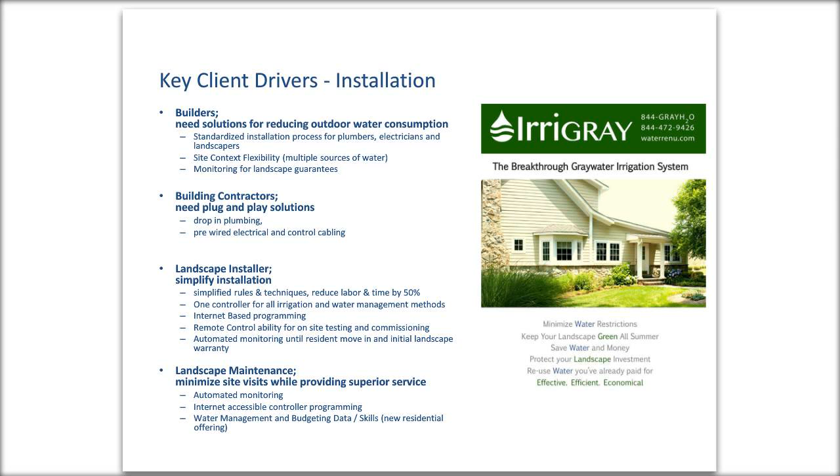What are the things we look out for when we design our products? It's not just about making the client happy. It's also about giving solutions to the builders and contractors, making it easy for them. Our feedback is that their number one concern is long-term support of the product, that they can remotely check systems, be notified automatically if there are any issues, and remotely reprogram or make changes if a customer doesn't want to do it themselves.

So we'll jump on to the next one. Here is what the system is: a small collection chamber, 18 inches in diameter. The effective or useful height is 30 inches deep, but you can have extensions to bring it up to ground level. Its job is purely to collect water, and when there's between 5 to 10 gallons, it activates and pushes water through a self-cleaning filtration system, which is also a water management module—that's the component in the middle. That then sends water out to up to 16 irrigation zones.

All of this is controlled by an Android-based tablet. This controller can work on the internet or off the internet. The vast majority of our customers want it connected to the internet because we then have built-in monitoring of their service. We have a lot of other options that can connect in, such as rainwater storage—I'll touch on that later. Condensate is a big thing happening in Texas. Certainly RO waste, reverse osmosis, as long as it's diluted. We have other uses such as potable gardens or vegetable gardens, which can't use greywater, and so forth. We'll talk about those in a few minutes too.

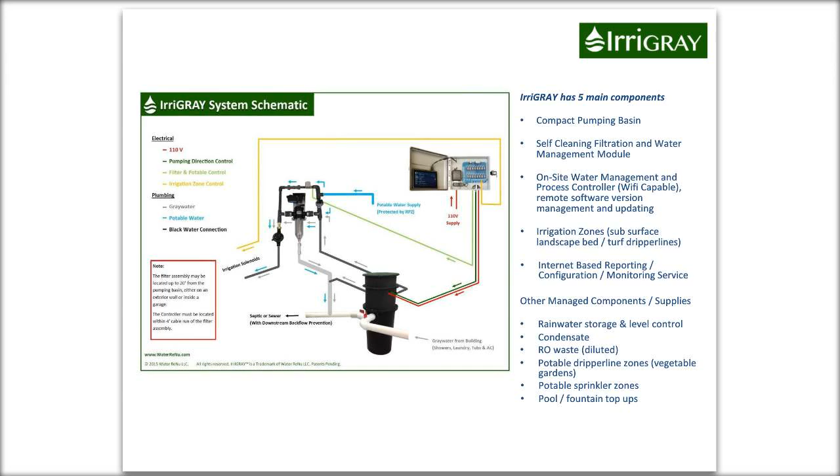So here's a quick look. As I said, 18 inches diameter, 30 inches deep. This is a happy medium for the builders on new homes, although it also works very well for retrofits if it's pier and beam. It's not a storage unit. It's not intended to be.

We believe that storage units actually create more trouble than they're worth. We do have larger basins, or in fact use twin basins for, say, commercial applications such as hotels. Hotels often do something like 600 gallons of very dirty grey water a day, so we handle that a little differently in the system.

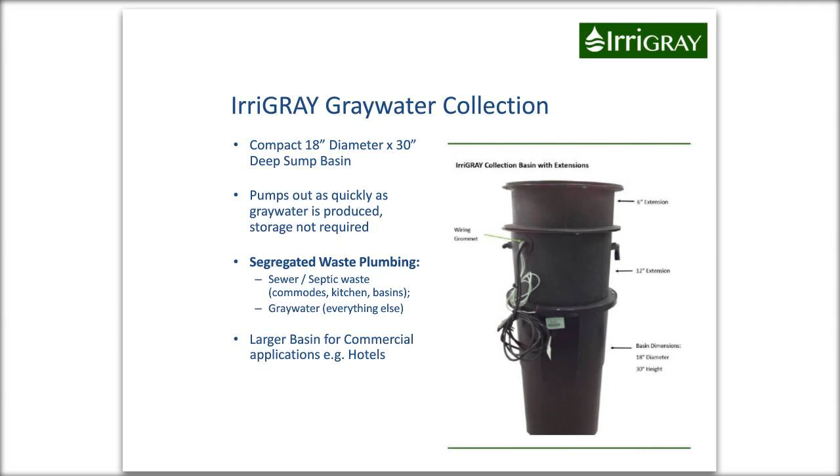This shows inside. We actually have a pre-filter before the pump. This is a coarse filter, and we actually don't really call it a filter. It's basically a foreign objects bag. It is to stop the crazy stuff that gets into a system from getting through to the pump, and we say it needs to be emptied once a year.

Practically we found that a family of 6 people only need to empty that maybe once every 3 years. It's quite coarse, about more than 1/8 of an inch in the filter separation. The other valves inside the pumping basin determine whether the water is going to irrigation or whether it's going to waste, and we'll get to that in a minute.

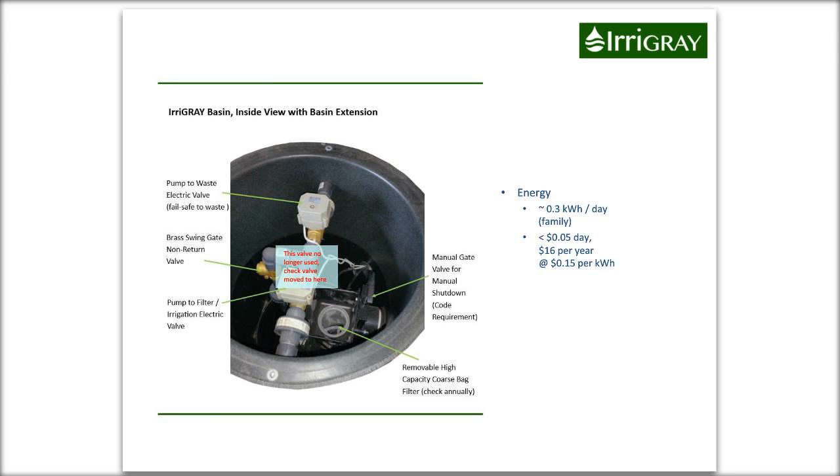This is the basic filter module. This is one example, a Lakos twister clean. When it cleans or needs cleaning, the filter turns 90 degrees by the actuator. Water goes in a different direction and blows all the dirt and other bits and pieces off the filter going to waste.

We have 2 valves feeding it. One valve is a backwash supply solenoid so that it only washes the filter. The other valve at the top is to give us potable supply, and that is essential in our experience to do things such as flushing drip lines to make sure that soap does not create issues with emitters in the future. You see we also have a meter. The meter is critical in the IrriGRAY system. Everything that we do is metered or the flow sensed.

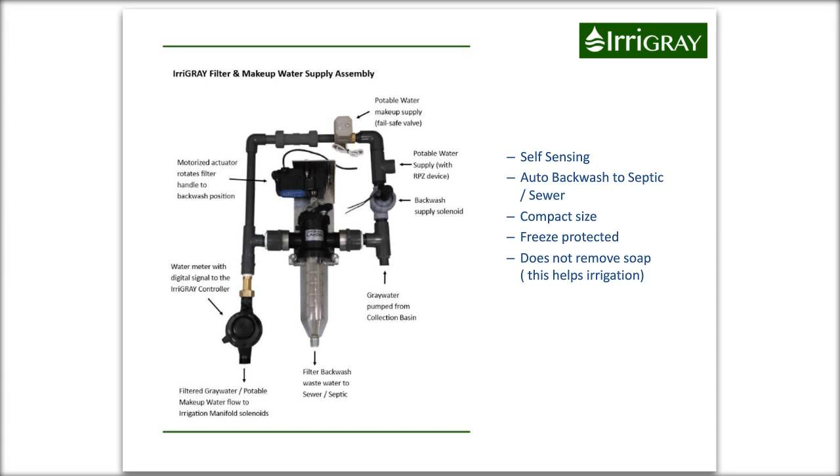Here's some other alternatives, disc filters. These are typically used on larger commercial applications, but also where there are water supply issues, such as low pressure or low flow. Note that the low flow is an issue for flushing drip lines on a regular basis, also for flushing filters. So these disc filters don't need as much water.

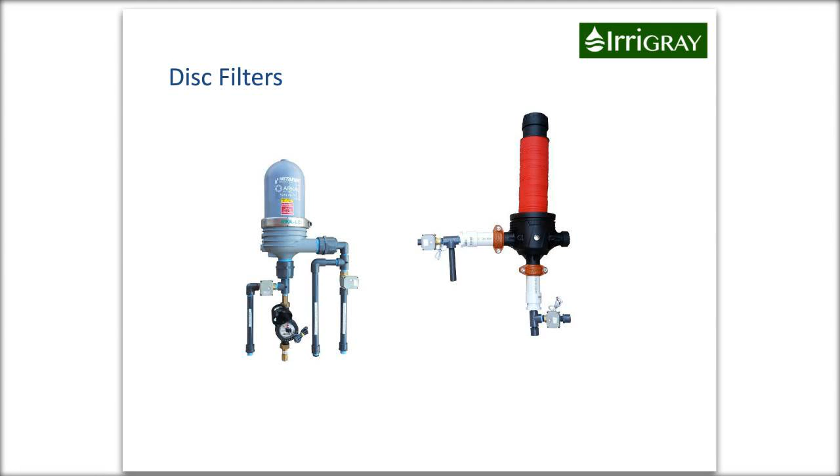They are not necessarily a cheap option. The first filter there is about a $1,300 option, and economically you can't justify water savings, as in this only needs to be cleaned 1/50th at the time of the screen filter. But you'll never recover that extra investment just because of the cost of water. However, as I said before, there are practical requirements in some installations to use these filters.

To briefly touch on the irrigation side, we use drip line, 2 different types. We have 2-gallon per hour emitters for landscape beds, generally 3-foot separation and 12-inch centers, whereas turf must be every 12 inches. This is to prevent any striping effects.

We'll note that for everywhere in the US there's no restrictions on grey water, very few restrictions on potable water for drip, other than some locations such as San Antonio, Texas. We'll point out that this is a capillary irrigation system in that it is designed to have moisture in the soil every day.

The IrriGRAY controller has been designed and developed by us, also manufactured by subcontractors. It is based on an Android tablet. It sits in the box all the time, and various sensors connect into it, or cables on these sensors.

This question came up. Actually, I'm going to respond to the two questions. I know, Laura, you're going to read them out. First, the question was, when is it... Wait, actually Paul, we're going to do the whole presentation and then we'll do the questions at the end. Okay, all right. So, look, basically the box is a box.

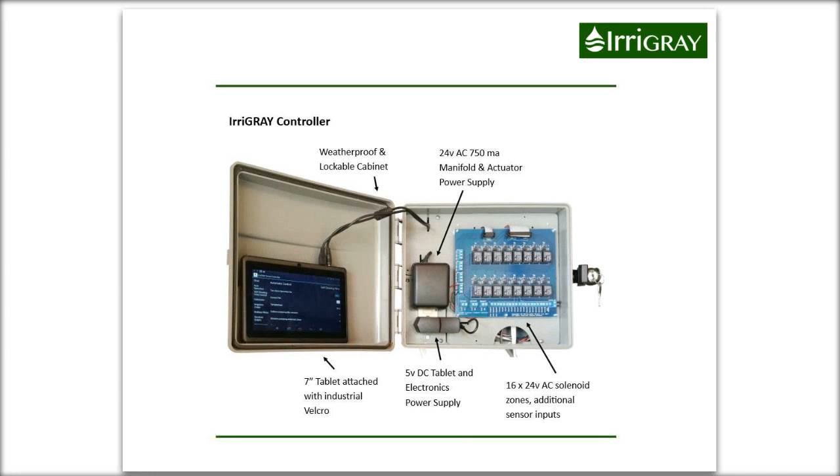The tablet can sit there. You don't need to touch it. Now, if you want to, you can go to the internet, and we'll look at that in a minute. Or you can run it as a standalone unit.

Where do things get interesting? This is all software controlled, and that controller is also software updatable. It self-updates to the correct version that we decide is correct for a client, which means that if a client has particular needs we haven't come across before, we can actually trial some changes in the system. The client doesn't have to touch anything, neither does their contractor, and we can monitor everything. And when we're happy with those changes, we can push those changes out to other clients as well.

But when you think about Greywater, what's a great example? How do you manage Greywater throughout the year? If you're on a larger property, you've got a septic, you probably want to keep your Greywater away from the septic, it reduces your maintenance costs, but you don't have anywhere to realistically use it for growing anything in the middle of winter. So this system is an advanced enough system that it knows when to put water out. During summer, you want to use every drop. You can just decide which months you don't want to use excess Greywater in growing things. Instead of going to the septic, you can have it go to a leach field and so forth.

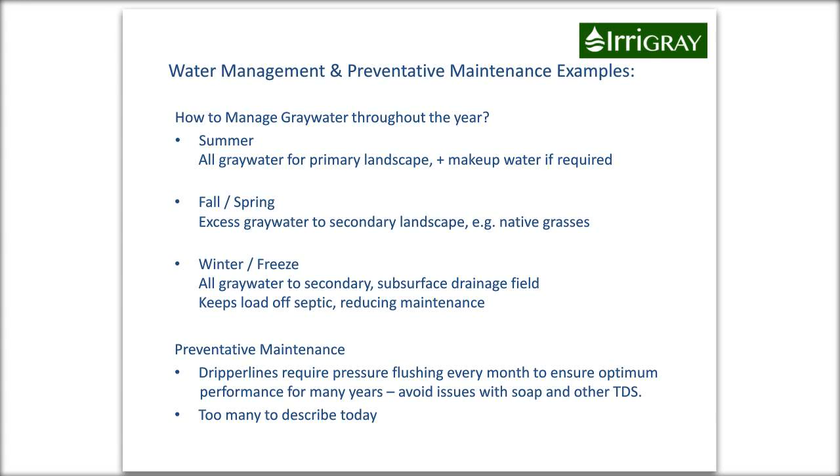Then there are other issues such as preventative maintenance. And as I said, dripper lines really do need flushing. The dissolved soap in dripper lines, particularly with under turf drip lines, can cause clogging after generally 3 months, but we do preventative maintenance automatically every month.

This is where I'd like to spend hopefully no more. I think I've got 3 minutes left, so we'll run through pretty quickly.

This is the controller software on the internet. Now, what you see here is the same as is on the tablet. They're exactly the same, a couple of minor differences. But what is developed on the internet is also the same on the tablet. You can do this on the tablet. You can do it on the internet. You can create different versions of settings on the internet. You can select which version you want to make current. And within a minute or 2 minutes, I think it is, the tablet will automatically update itself to these new settings.

But starting here very quickly, how the system is programmed. Start off with climate and water. Select where you are. It grabs all of the relevant evapotranspiration values for your area. You decide, for example, in January, February, November, December, we don't want to use too much Greywater, so that can be sent either to waste or it can be sent off to a disposal zone, and we'll see those in a minute.

Further down that page, you can then set which days you are allowed to do various types of potable water use, and they are different for sprinklers as compared to dripper lines, and there are restrictions coming in about dripper lines in various areas at the moment, more so in Texas and California, it seems.

So once you've set the information about where you are, then you can set up the zones. Here's an example, Zone 2, Greywater Turf South. This is one of our test units. We do a lot of testing. So this zone only has an area of 200 square feet. We've selected a particular planting type, the density, and which days of the week it would normally get Greywater. And that is all there is to programming the system. There's no minutes, nothing else. The system calculates it for you.

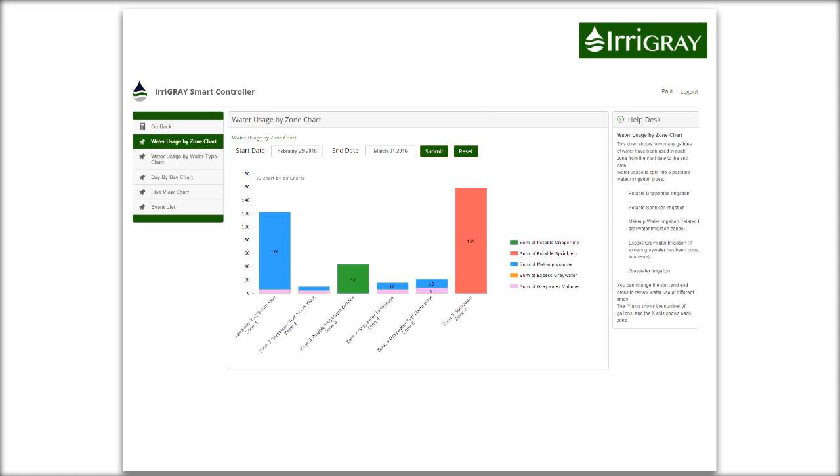Once we've programmed it and it's been running for a while, then you can start seeing some of the charts. And the reason for so many different colors is we have different types of water. We've got green here, which is potable water only drip lines. Red is sprinklers. Purple is Greywater that's going out during the day. And the blue is makeup. So they didn't have enough purple in this test environment that we were running.

Then you can start to see usage day by day, how much of the different types of water you're using. You can even see down to the minute level. We can zoom in further if we were live. At various times of the day, different symbols indicate when things have happened. It's very useful sometimes. I don't believe...

There is one that I didn't show. At the bottom of that menu on the left, it says event list. You can actually see everything that happens, or every bit of data that is sent from the controller to our internet server. And that includes information such as flow rates, pressure on different zones, temperature, battery levels, depth of water in the pumping basin, and so forth.

This last one, and I'll finish, is to give an example. I'd love to show this live, but we trialed this yesterday and it's just too slow on the internet on this session. But one of the most valuable features that our installers have found is the ability to have this remote control. You can totally take charge of any individual function, singly or together, on the system to test flow rates, pressures, and that's normally done to detect if there's any blockages anywhere or whether any distribution lines have been damaged and so forth. So I've run out of time. Let's go to questions, I believe.

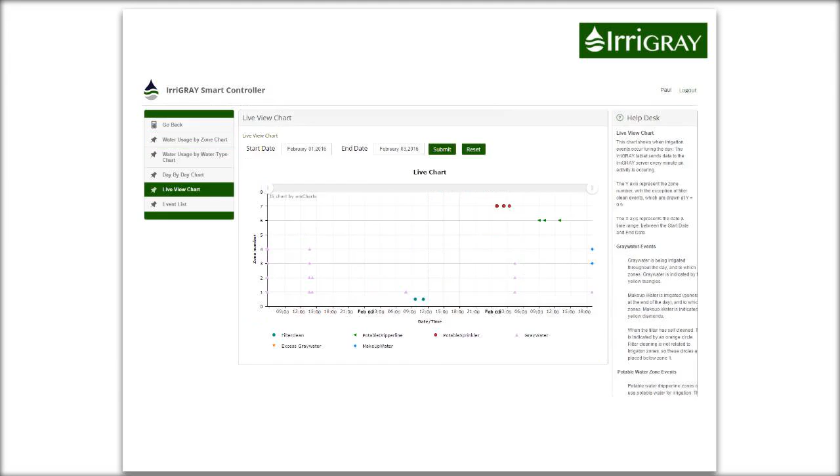Next question, Laura. So the next question is, can all of your systems accommodate the rainwater storage option? Absolutely. I'm going to take a sec to get back there. There we go. What we do is effectively consider that the rainwater storage is in line between potable water and the water management system. And then we treat the rainwater storage as a unit that never runs dry, so we actually manage how much water is in this rainwater tank. It's critical to always use rainwater when it's available so that you can then leave space in the tank for when it rains next time.

I know that IrriGRAY is being installed in a subdivision in San Antonio, Texas. Could you give us an update on that project? Yeah, it's actually San Angelo in Texas. Oh, excuse me, San Angelo. That's okay. It was an interesting one. It's been driven by the builders and the developers rather than the city, although the city is very happy to be supporting it. San Angelo came within 3 months of running out of water. The builders are under a lot of pressure.

The communities do not want more homes built unless these new homes are water efficient outdoors as well as indoors. So what happens is the developer gets together with his selected builders and says, I want this subdivision to be water efficient. It makes it easier for me to get my permits, less public resistance. And when people see one subdivision that mandates it, they start going to the other subdivision saying, look, you need to do this too, because I'd rather buy in the other subdivision. I know that they're going to have green landscapes for years ahead. Whereas if they're not doing it, there's a strong likelihood their landscape will be in a lot of trouble within 2 years.

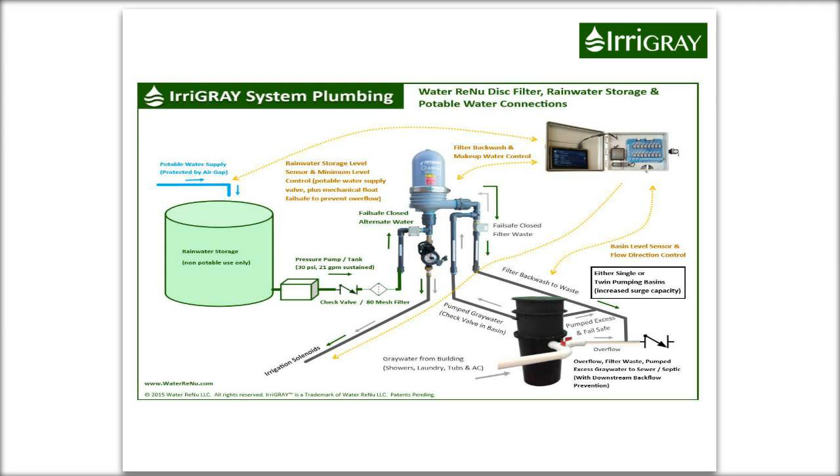Okay, so we're going to go to our next presenter, which is Bob Hitchner from Nexus E-Water. Now let me just switch you over. And Bob is going to be talking about a system that does indoor as well as outdoor water.

And let's see, Bob, can you hear me? Are you online? Let's see. Well, are there any other questions? I'm going to make sure I can get Bob up there. He is definitely on the call. Oh, do I hear you now, Bob? Let's see. We're having a little bit of a technical difficulty. So let's try our next presenter, Sam Milani. Can you speak? Yes. Okay, great. So Sam, you can hear. Great. So we're going to skip back to the very front. Let me go back, and apologies. We had a little bit of a glitch with our webinar and time changes and all these things. So we're going to jump back to the front.

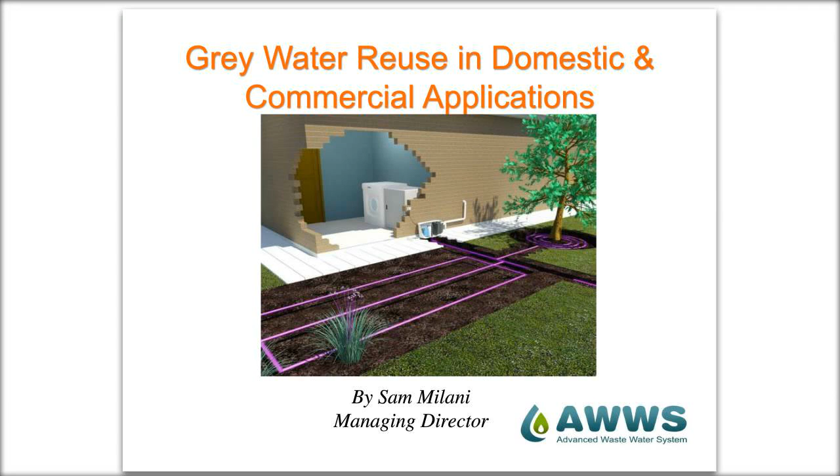So the third thing that we've learned is that people do not like to clean filters. Okay. I'm reading from my presentation. So, installing basically self-cleaning filters, and that's what we developed because people don't like cleaning filters. We spent about 4 years developing an automatic backflush filter, which cleans the filters so nobody needs to actually take the filters and deal with that dirt.

Drip seems to be, as far as we're concerned, the best way of distributing water throughout the garden in a wide area. And also we've learned that with new homes, the best way to install is actually doing it in 2 stages. We have developed what we call a builder's kit that is installed at the pre-lay stage initially, and then a finishing kit that is installed later on.

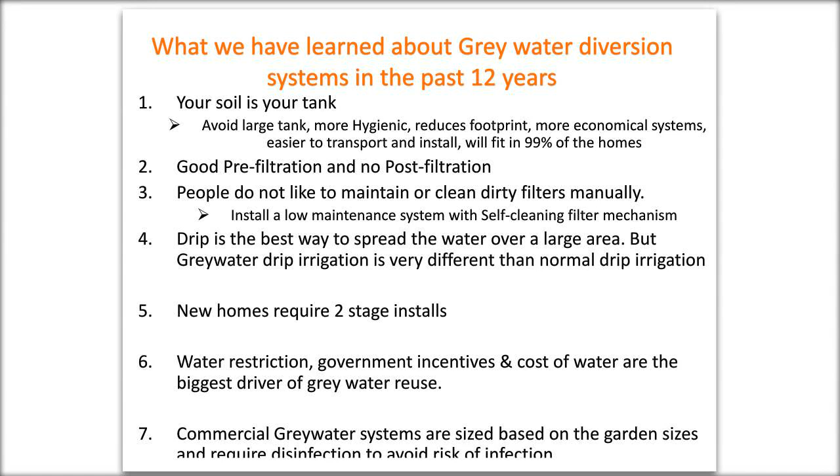We've also learned that water restrictions, government incentives, and the cost of water are the biggest drivers for greywater reuse. And we've also gone into commercial greywater reuse in the last few years. I'm just going to try to cover some of the systems we have. We have a very wide range of systems because not every plumbing is the same.

So we did start with the G-Flow, which was a little unit with vertical filter, so that you don't have to clean too often. But we also incorporated what we call a sludge trap in order not to deal with the sludge of the system. That's been quite a popular system for people who want to install the systems themselves.

Later on, we came up with systems that are larger and more automatic. The self-cleaning unit, you could see it on our website and also on Gray Hub's website, you will see how it operates. We actually backflush the filters with air, not with water, and that makes it a very effective cleaning, but also very low in maintenance.

So the Grey Flow PS is a little unit that we developed a few years ago, and that has been selling for the last probably 6-7 years now. We then developed more recently, the last 2-3 years, what we call the Grey Flow Pro. Again, self-clean. Most of our biggest systems now are all self-clean, and clients all over Australia and South Africa and other countries really go with the self-clean, especially the ones who have had a little bit of experience with gray water.

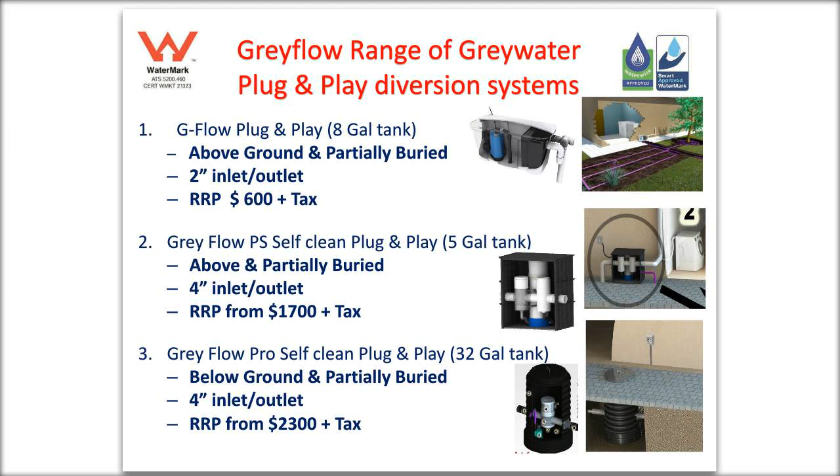The 2-stage install for new homes is actually quite an important development. We found that if you did install the whole system at the beginning, you would risk losing pumps and parts because often the plumbing is done before the house is even erected. So we have designed what we call a builder's kit, whereby the plumbers install it while they're doing the plumbing.

That actually saves quite a lot of money. Instead of bringing back a plumber on site, initially the plumber, while he's doing his plumbing, is installing the builder's kit, which is just the carcass of the system itself.

Once the house is erected and power is available, and before doing the paving, then we sell them the finishing kit, and the finishing kit doesn't need to be installed by a plumber in Australia, whereas the builder's kit is part of the plumbing and needs to be installed by a plumber. So we have what we call accredited installers throughout Australia that are actually installing the finishing kit, installing the drip system, and commissioning the system and showing the owners how the system operates.

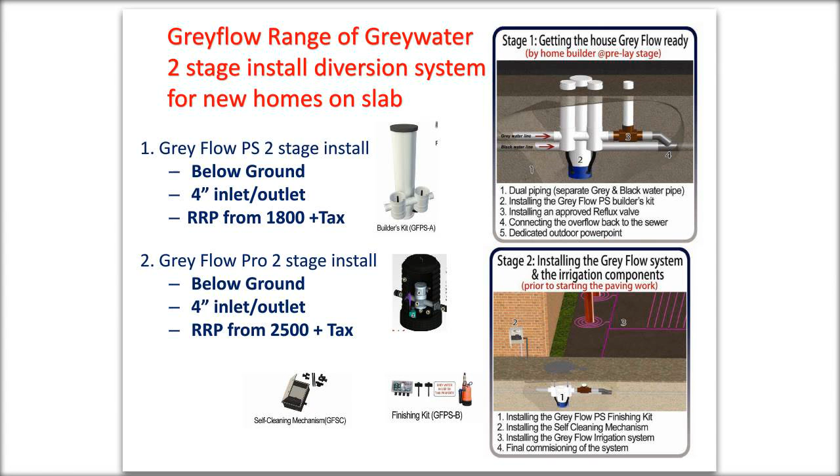This has been the best way to actually install a system for new homes.

As for the greywater irrigation, we've done a lot of trials for many years initially, and we've gone with a drip line which has about 2.6 gallons per hour discharge per emitter. The passages are very large. Gray water can be dirty, and sludge tends to accumulate into the pipes, and having a very large opening helps to flush the drip lines every time.

The drip lines we've had on site have been operating now for more than 8 to 10 years. We still recommend after maybe 10 to 12 years to change the drip line and put in a new one.

We've also developed what we call a rotor valve, which allows the water to be rotated throughout the garden. Often you can't water all your zones, especially if you have a big garden and want to water a large area - you would need a very large pump. So instead of using a very large pump, we can use small pumps and rotate from one zone to another. The rotor valve is a volumetric indexing valve, with one inlet and 6 outlets, and it discharges about 13 gallons per zone and then shifts to the next one.

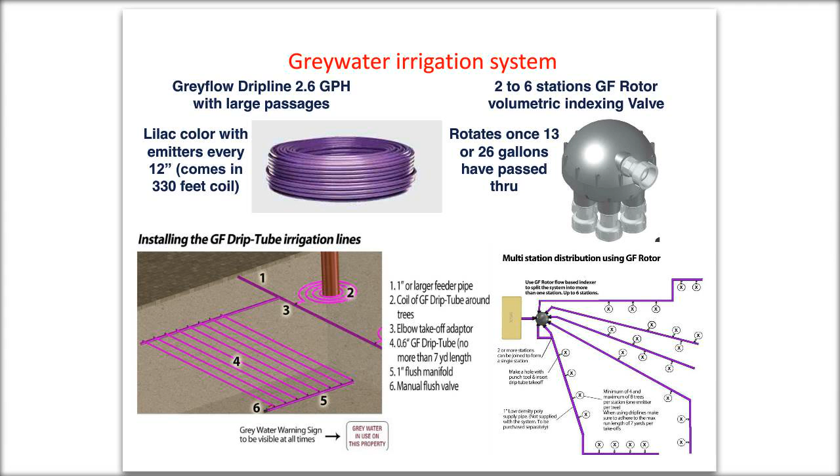I'm probably going to go now through some of the domestic applications. Unfortunately, I don't seem to have the presentation in front of me - it seems to be loading.

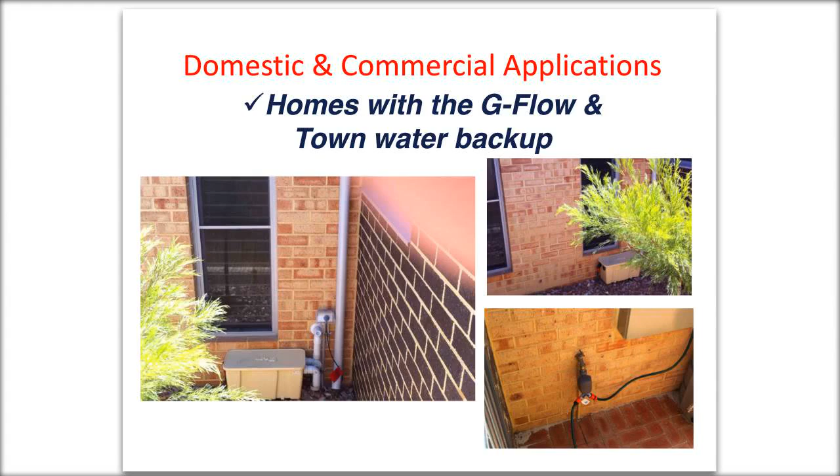If you look at the second picture, you will see that the drip system is actually below mulch, and there is an entry, a three-way valve, and an overflow to sewer, so you can isolate the system.

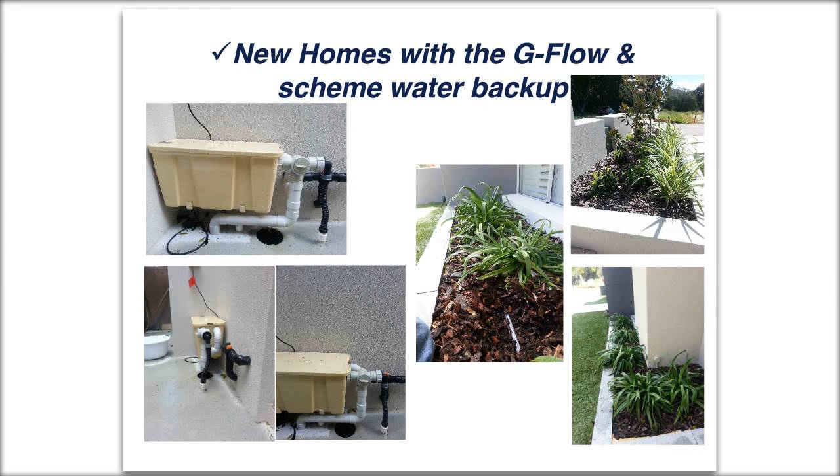The third picture shows the G-Flow in a new house, how it's been installed. You can see that everything is on the ground except the backflush system, which is wall mounted in a cabinet, and that wall mounting unit has an air blower and a controller which takes care of the backflush of the system. These systems can be installed and not touched for a couple of years.

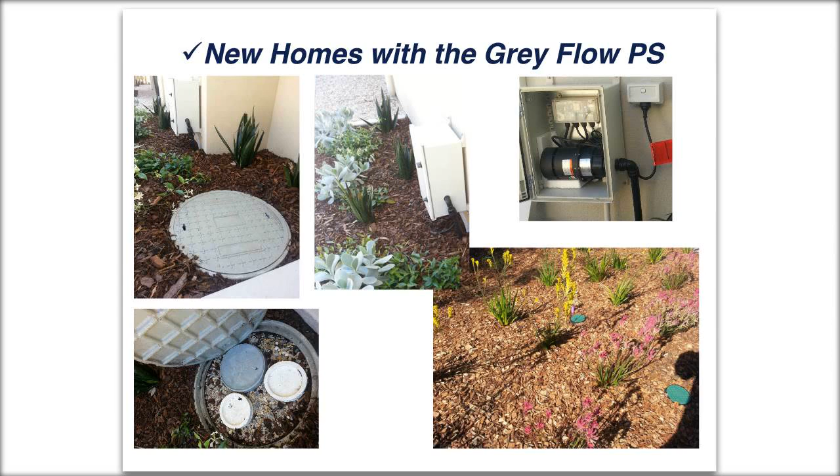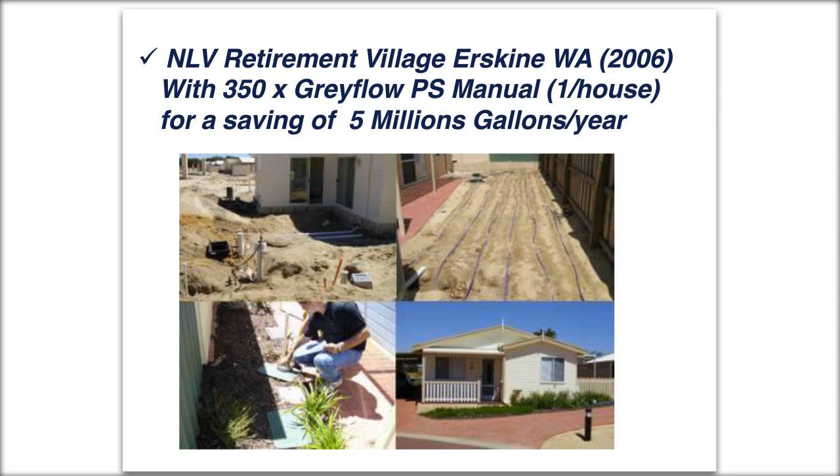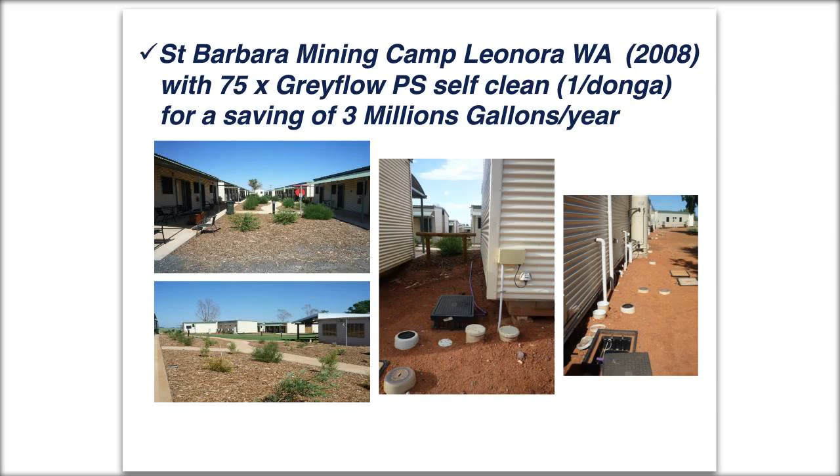If you look at the picture in 2009 and then 2011, you will see that the whole camp has become green. And it took, within 2 years, the whole area greened up, and that didn't take one drop of fresh water. All the water came from greywater.

That camp gets a rebate because on their sewer fees, we have a law. I don't know if it's the same in the U.S., but when you discharge water into the sewers, you pay a sewer fee, and if you can reuse your gray water, they give you a discount on your sewer fees because you're not discharging the water into the sewer.

The next picture is the project that we did with Coogee Surf Life Saving Club, a surf life saving club in Perth, Western Australia, where we're watering all the gardens with the commercial Greywater system. With commercial Greywater system, we have to use disinfection because the water goes into public open space. We don't remove the nutrients, but we ozonate the water and disinfect it and reuse the water into the garden. This is all a subsurface system under the lawn, and it has pre-filtration and post-filtration. So we have both, and both are self-cleaning in that project.

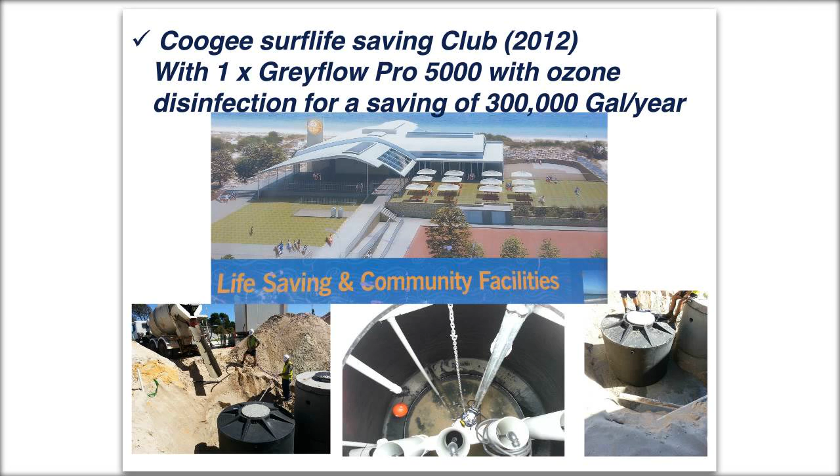You can see the savings are quite considerable. With a commercial system, we can save quite a bit of gallons per year. So in the mining camp, about 3 million gallons a year. With the retirement village, about 5 million gallons a year. With the Surf Life Saving Club, about 300,000 gallons a year.

We've also done some small commercial projects where we're reusing the water from a building for a small garden. Now the garden is a lot smaller than the gray water coming from the building, so what we did is size the system to cater for the garden. The system only accumulates the amount of water that the garden needs. The rest of the water goes back to sewer because it's connected to sewer. And again, here it's a commercial application, so ozone has to be used to disinfect.

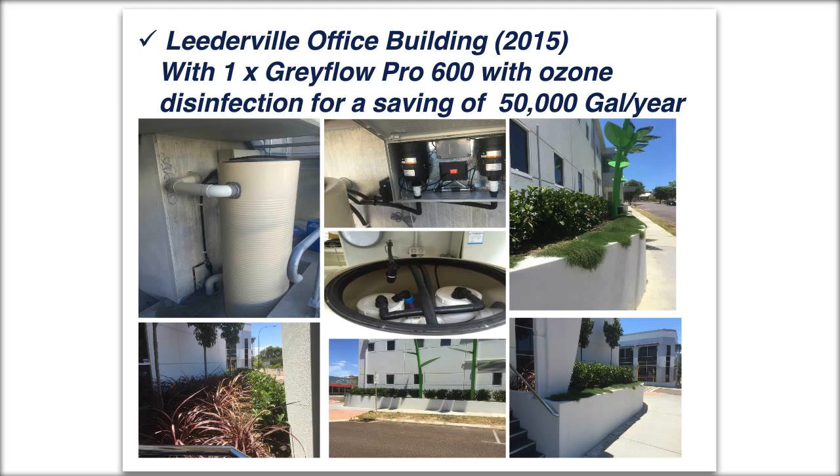The other projects that we've done, again, Caravan Park in Western Australia, where we're reusing all the shower water and watering the gardens around the cabins in the Caravan Park.

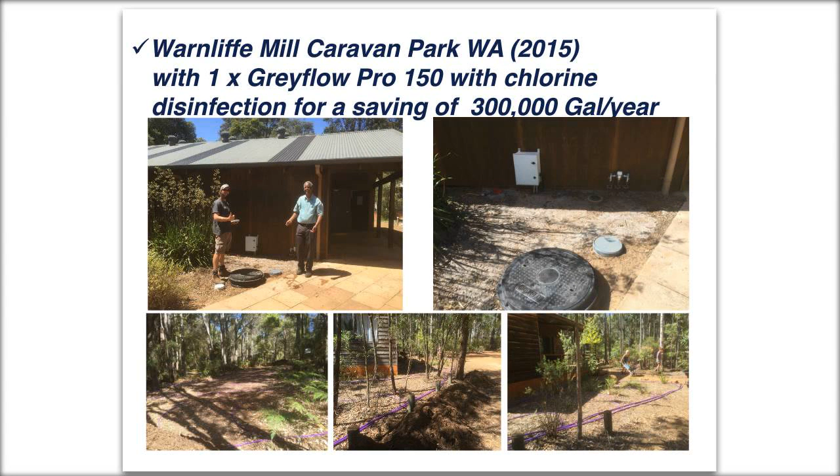We are right now presently doing another 2 large projects, which are aged care facilities, and we are only reusing the gray water from the laundry washing machines. These laundry washing machines have 2 outlets. They have what we call a wash cycle, and then they have a rinse cycle. The rinse cycle comes into our gray water. The wash cycle goes into sewer. So we've been able to recycle quite a bit of water there, and we're doing 2 of these projects right now at present. So one project where they're installing the drip line all throughout the gardens.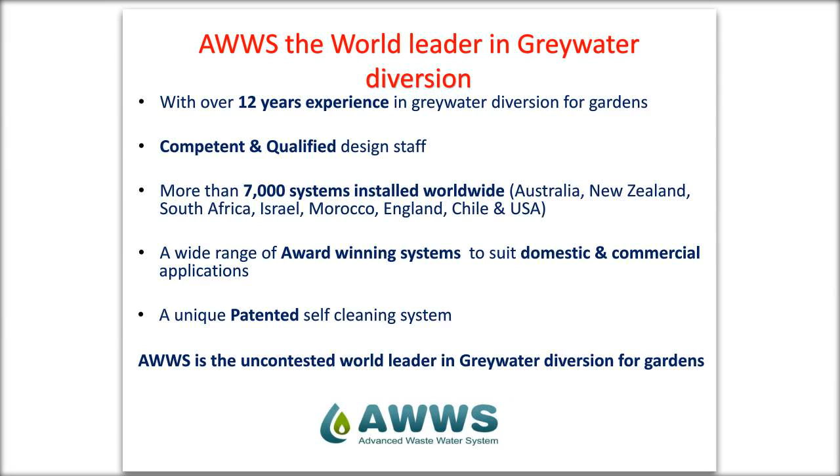Okay, great. Thanks very much, and thanks to Greywater Action for putting on this webinar series, and to the other presenters for talking about other systems. What I will try to do here is to highlight how our system may be a little bit different than the other ones. I guess it's lucky being last because you have a chance to contrast as you go along here.

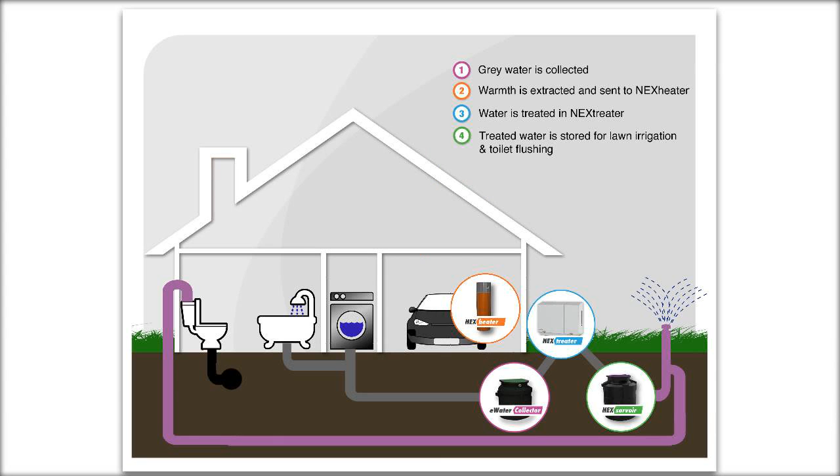Our company is also born in Australia, but we are now headquartered in San Diego. A lot of my comments today are going to be talking—if I talk about code, I am usually referring to California code. And if you're from outside of California, you of course need to check with your local code. Regulations for greywater do vary quite a bit from one region to another. Just keep in mind that what I'm talking about may not be about your specific jurisdiction.

So ours, like the other systems that have been discussed today, is a whole home system. It is integrated into the plumbing infrastructure of the home. As you see in this illustration here, the black water—the waste, from toilets and from the kitchen—in this case, you see there's a little line going from the toilet out. That is the black water. And all of the other fixtures in the house are sources of gray water, and they have their own piping system which takes the water out of the house and places it into an in-ground tank.

From the in-ground tank, we take the water out, we treat it. We are actually disinfecting and filtering the water, and then we place it into a second in-ground tank, which becomes the primary source of water for all of your irrigation. And also in California and some locations, you can bring that water back inside the house to flush your toilets. So this is just a start here on how we set it up, showing that it's an integrated system.

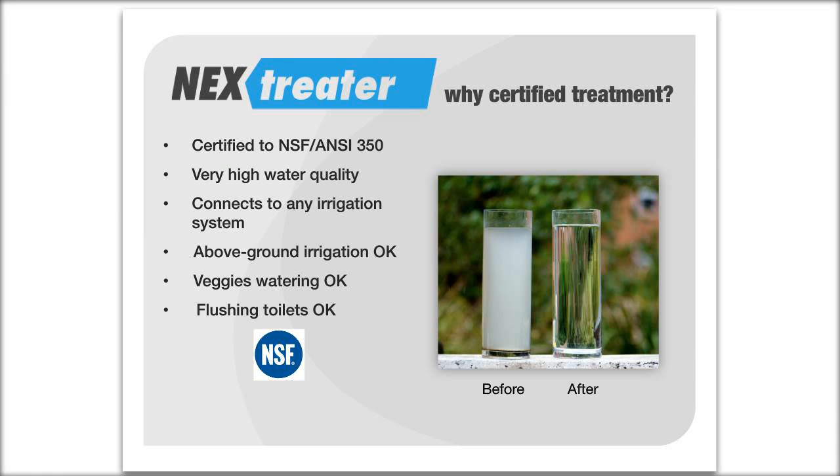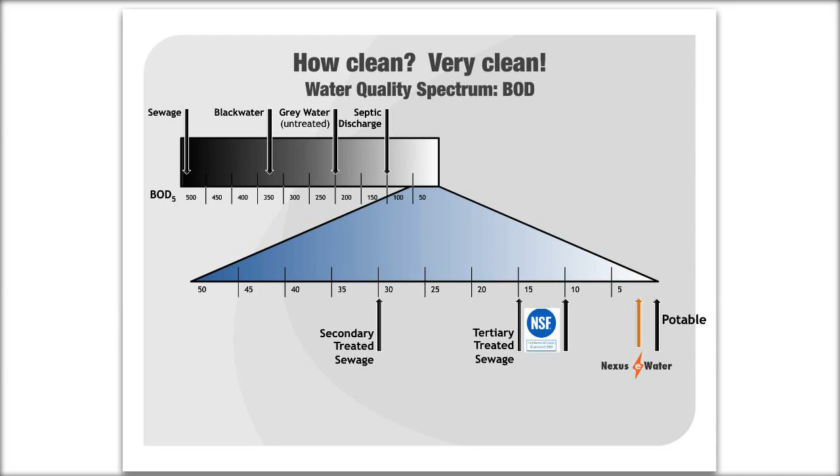As you get down into the lower range, tertiary treated sewage is the water that is disinfected, treated, and put into purple pipe systems for recycling use. In California, the BOD in that water needs to average 15 or below. Our system is certified to the NSF 350 standard, which requires a BOD below 10. In fact, when we tested with NSF, our BOD was between 0 and 5—very, very low and close to what potable water would be. So it's a very clean, recycled water by the time we finish treating it.

As I said before, it's an automatic system. What does that mean? Because it's treated, we're able to treat the water and put it into storage, and then use it at any time—we don't have to use it within a specific time frame. So what we do is try to keep a full tank of cleaned water on site, and the irrigation controller will call for water when it needs it, pulling the water out of that tank. Your irrigation control system may need to be tweaked a little based on the size of the tank, but you'll manage it just like you would manage the irrigation control system on your landscape today.

It works in the background. The homeowner is not asked to actively manage the system—it sets up and then operates continuously. We have automated alert systems, so there are several maintenance cycles in a year when you need to change a filter or change out an ultraviolet bulb. When you need to do that, you'll receive a text or an email telling you it's time to do so.

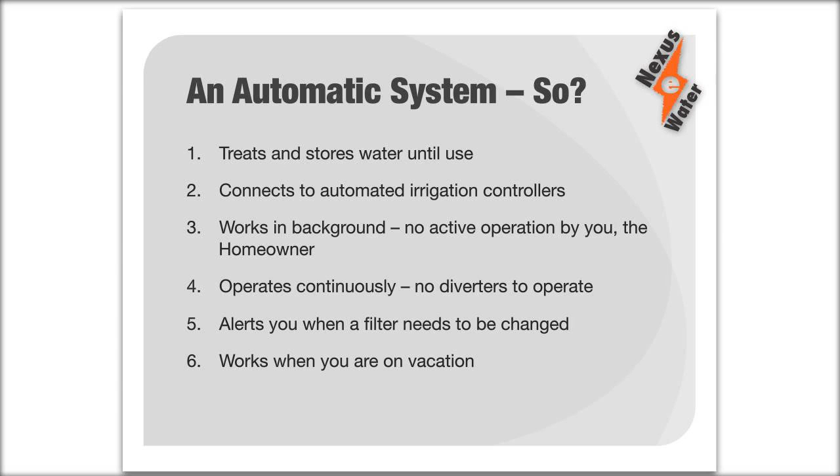The other thing is, because it's automatic, it has the ability to top up with city water whenever it needs to. So if you go away from home for 3 weeks in the middle of August, you don't even have to set up the system to operate differently. You would just say that if I don't have gray water in the tank, please fill it up with city water instead, and we'll use that while I'm away. So an automatic system doesn't require active homeowner engagement to operate properly, and we think that's a real advantage.

You can either set it up so that in those times it only gives as much water as you have gray water, or you can set it up to provide as much water as the irrigation system says it needs. In the latter case, it will call on city water to top up the tank as needed.

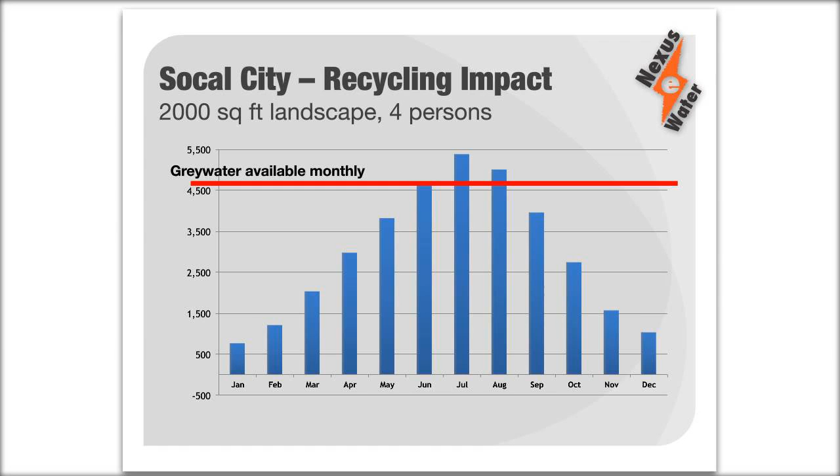As I said before, we've got an app for that. It's going to tell you how much water you are recycling, how much water you are putting into irrigation, but more importantly, it will tell you when you need to service the system, which is usually, as I said before, a twice annual cycle.

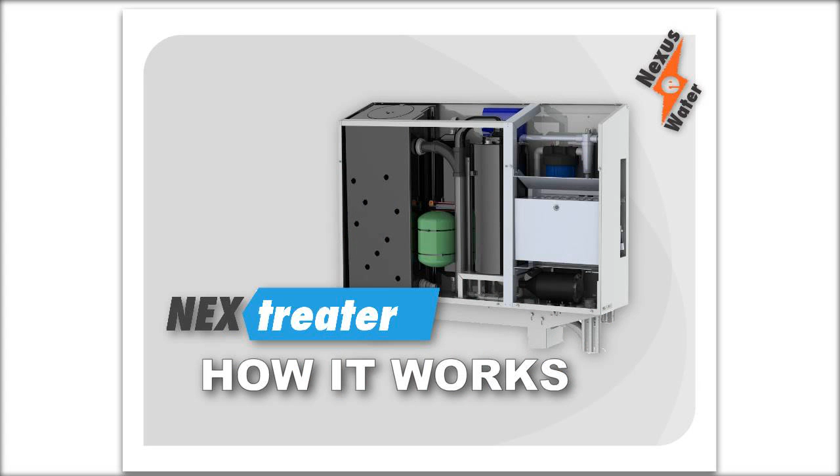So let's take a really quick look at the treatment appliance. Remember, we have two tanks underground, and then we have this treatment appliance that sits above ground. This is what the treatment appliance looks like when the cover is off. As I go over here, this gives you an idea of what happens in the treatment process. We pull water out of the raw gray water tank, which is on the left, and take it through coarse filtration, which essentially takes out the hair and lint that may be in the water.

We bubble the water. We have a micro-foaming system that actually aerates the water, and because it's aerating soapy water, it foams and bubbles, and the bubbles rise to the top, and then those bubbles are wicked off into sewer. After that, we have two different levels of filtration: an activated carbon filtration, and then a very fine mesh filtration. By the time those processes are complete, the water really looks and smells like drinking water. At that point, we expose it to ultraviolet, which kills the pathogens that are in the water.

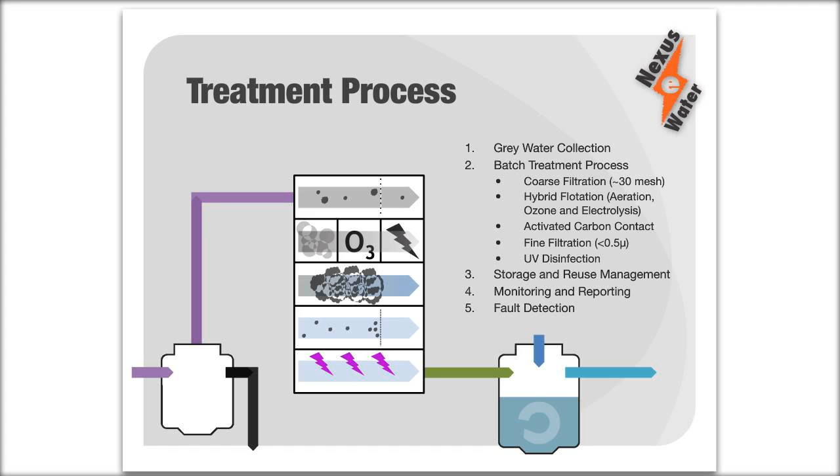So we're doing disinfection at the very end. When that is all complete, we put the water into the tank on the right, which is the cleaned water tank. As long as there is raw gray water available on the left, we will keep processing water until we can fill the tank on the right. And when the tank on the right is filled, we wait until there's some use of water before we will treat any more.

Installation requirements. The best thing for you to do is to go and download our Nexus guide to the Recycle Ready Home. It's on our website, which is at nexusewater.com. It's on the home page, and you'll see a download button there. That will give you the detail, but these 8 points here are really the critical things.

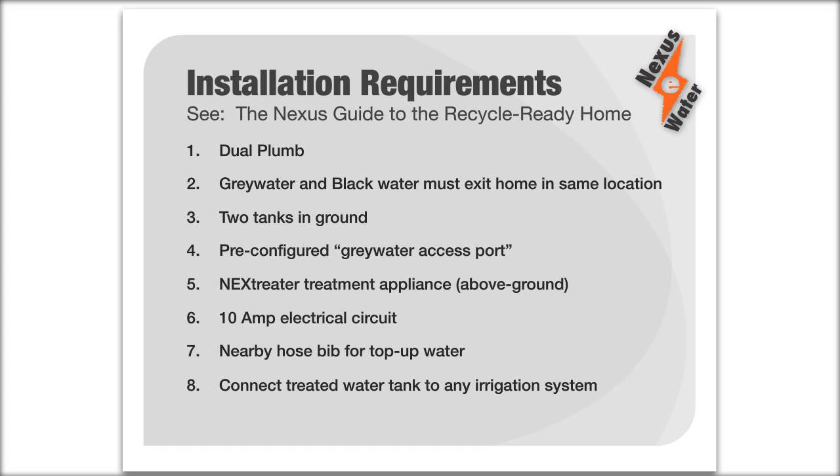The home needs to be dual plumbed. The gray water and the black water need to leave the home in about the same location. We put two tanks in the ground. We pre-configure a mounting bench, and I will show you pictures of that in just a second. Then we put the appliance on. We need an electrical outlet, and we need nearby water available as top-up. Then all we do is connect the treated water tank to any irrigation system, and you are ready to rock and roll with gray water.

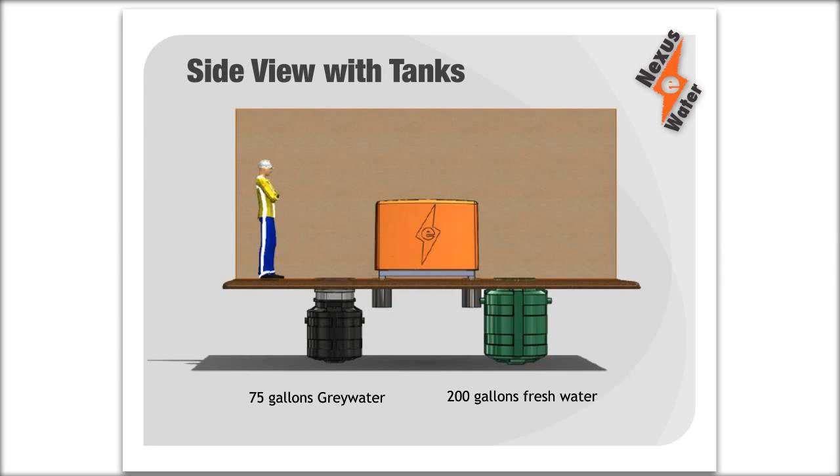Here is what it looks like when you are putting the tanks into a home. In this case, they did it after the main home had been already constructed. Normally, in the case of new home construction, we would do this during initial rough plumbing trenching of the home at the very beginning.

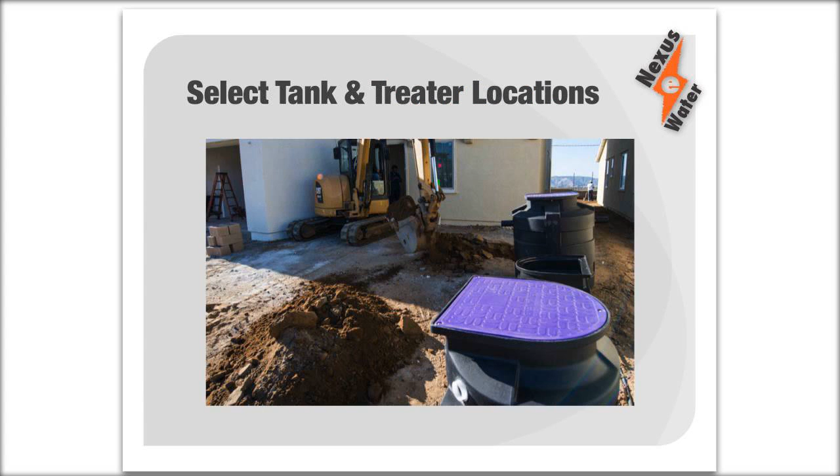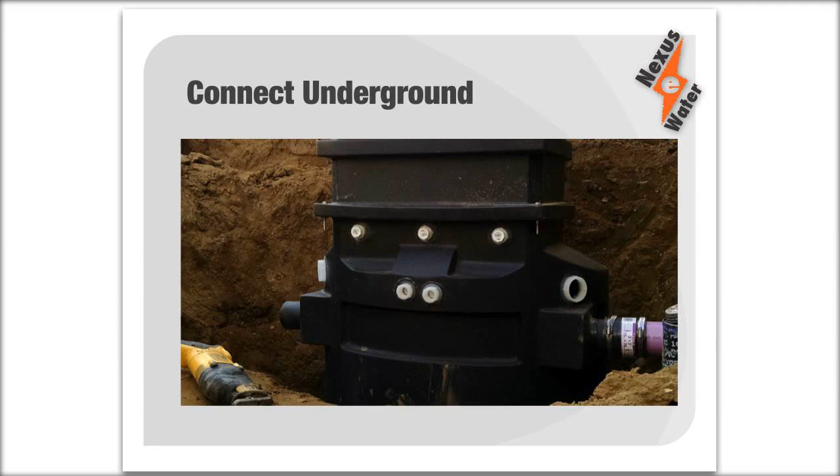Here are the backhoes at work. It's a lot of work if you do it by hand, but it's not a lot of work when you already have the backhoes on site. Got to get everything into the holes correctly. They have to be lined up and connected together. You see, we have some venting that works out of the raw gray water tank, and that's what's being connected up in this case.

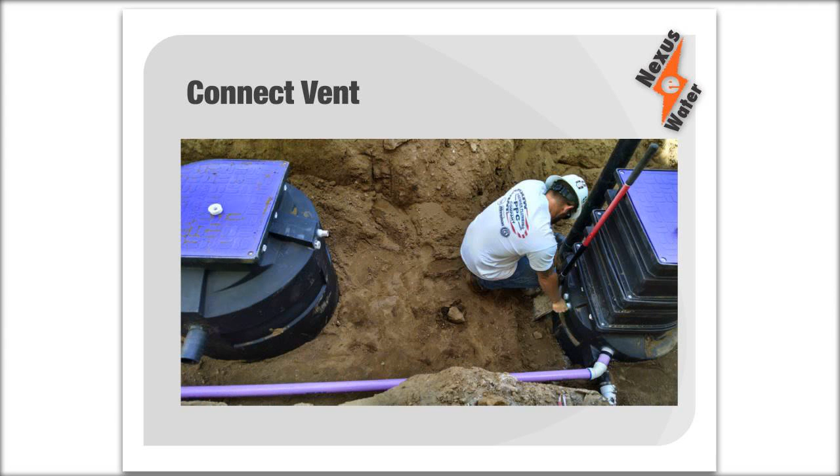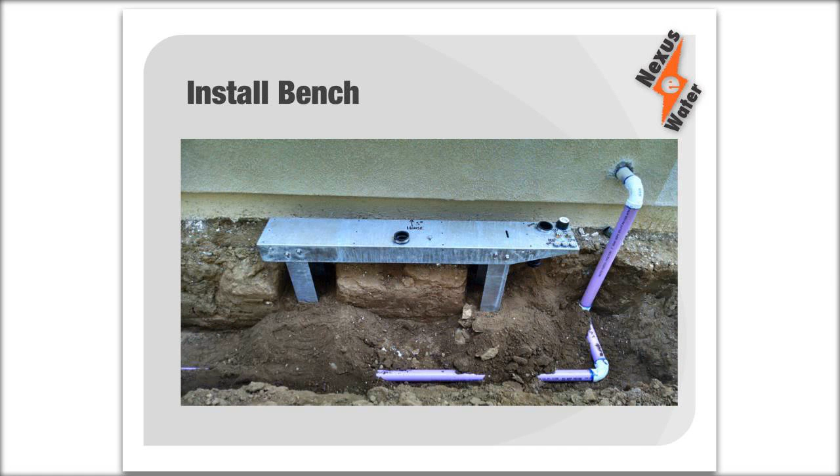And then here is the bench that I've talked about. You see that it's placed in concrete piers here, and the plumber is going to come in, and at the next step, the plumber is going to pre-connect all of the different connections to the tanks, to the potable water supply. The electrician will come in and bring the electric power in, and then it will look like this.

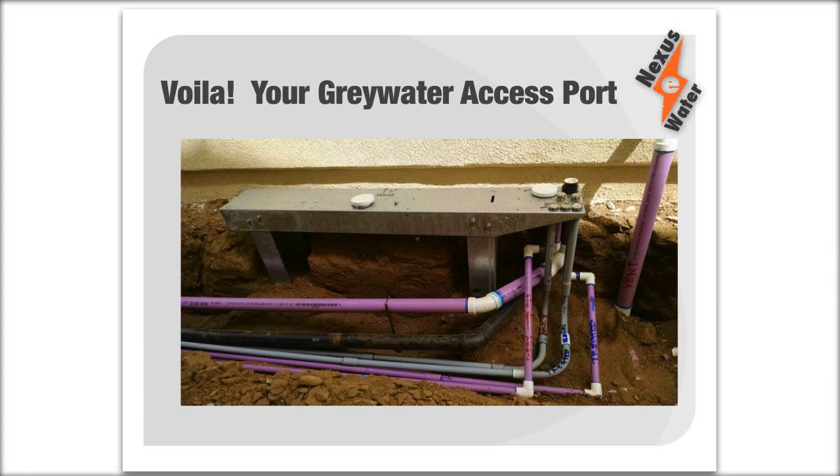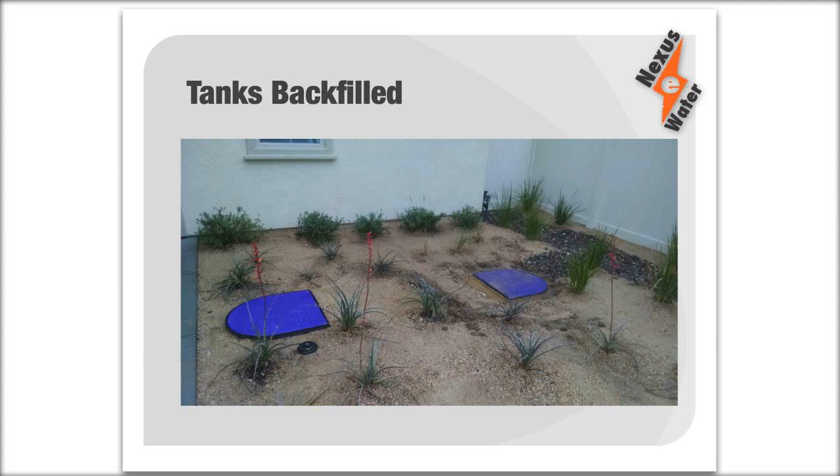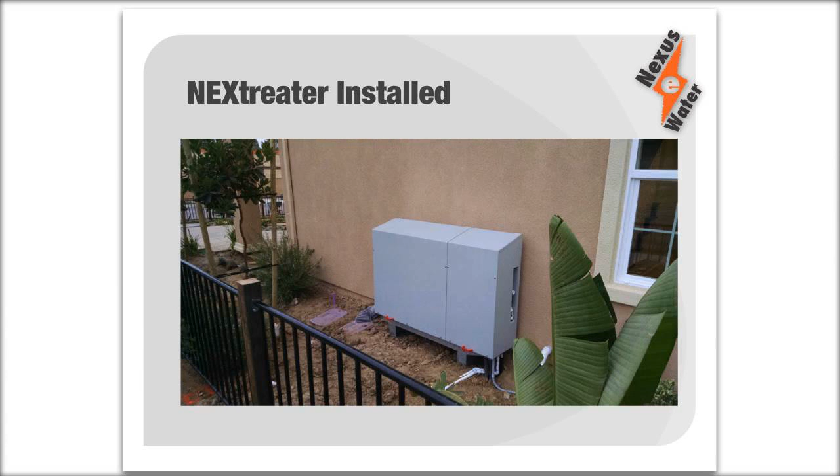And all we have to do at that point to make it ready for recycling is to level it up, bring everything together, fill in the ground around the tanks, and then we put the device on top, and we're connected to the irrigation valves, and we are ready to go. So this is what it looks like above ground, but there was a lot of work that went in behind the scenes and under the ground, obviously.

So I highly recommend that you go to our website, that you download our guide to the Recycle Ready Home, and this is useful whether you want to retrofit your home or whether you're thinking of building a new home. If you are building a new home, you should ask your builder to make it recycle ready, and this should be part of what the builder constructs from the very get-go.

It is not expensive to make a home recycle ready if you do it from the very beginning of the home. But anytime you retrofit a home with a greywater system, you're going to incur extra costs. So if you're building a home, tell your builder, make it recycle ready, and you can get them to come and download our guide to it.